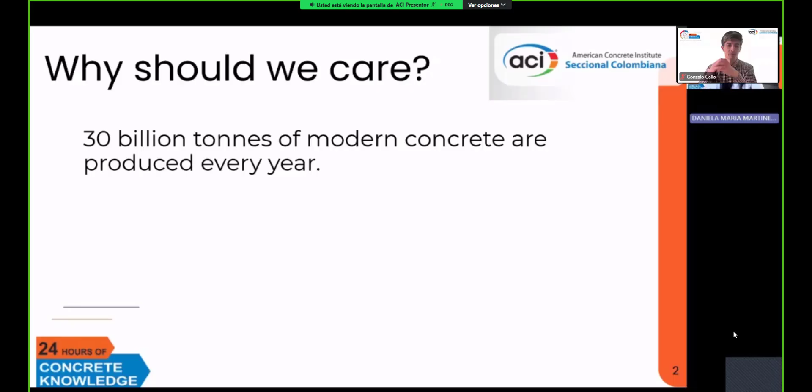In fact, cement, which is the main ingredient in modern concrete, along its supply chain is responsible for roughly 8% of global CO2 emissions and approximately 3% of global energy demand. So this challenge motivates the search for alternative materials, alternative production methods, and lessons from historical construction practices that we can apply, hopefully, in our modern infrastructure.

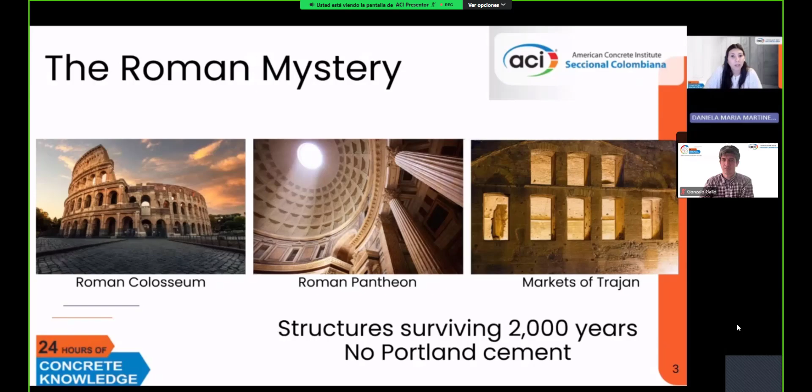So let's talk a little bit more about the Roman concrete infrastructure. Roman concrete has attracted attention because many Roman structures remain standing today. These structures, like I mentioned before, have survived more than 2,000 years and were built without Portland cement. Some of the most famous ones I'm showing here in these pictures are the Roman Colosseum, the Roman Pantheon, markets of Trajan, etc. So we have asked, did the Romans discover a more sustainable way to build, and are there lessons that we can apply today?

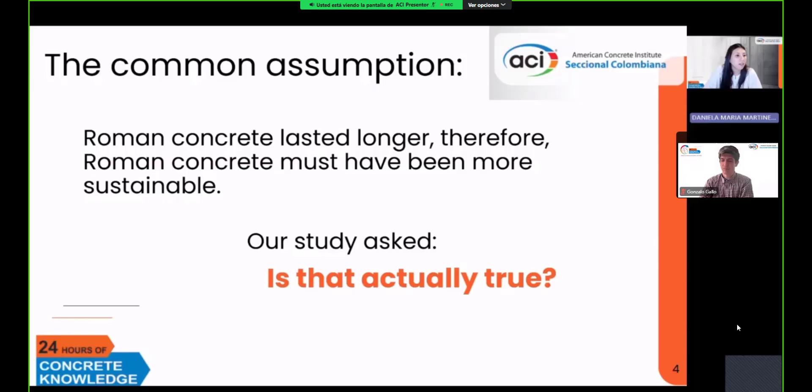So the common assumption usually is that if Roman concrete has lasted longer, therefore Roman concrete must have been more sustainable. So our study specifically asked two questions. Is this actually true? And could Roman technology help us decarbonize construction? But first, we need to learn or revisit what was Roman concrete.

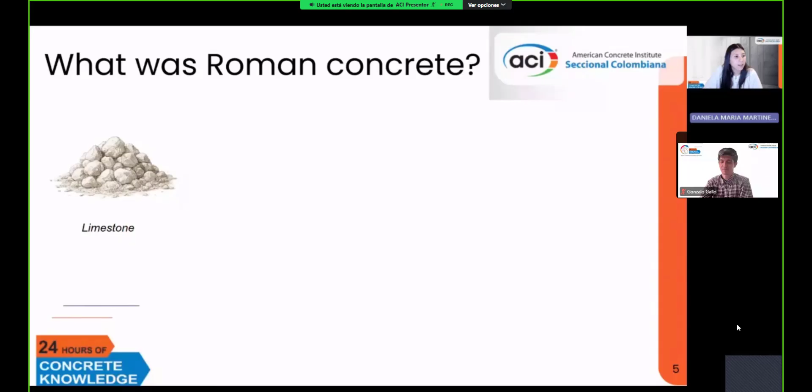Roman concrete consisted primarily of limestone, which is one of the main raw materials that we use today in our modern Portland cement. And this limestone was also heated to a certain level to obtain quicklime or hydrated lime, like we normally do with our modern cement. But this product was also mixed with volcanic ash, which is a pozzolan, and mixed with water to form a mortar. And this water was often seawater.

And this Roman mortar was then further mixed with big chunks of fragments of rocks or rubble from debris from other demolition sites or construction. And this massive concrete was what was used in Roman infrastructure.

So like I mentioned before, limestone first was heat treated to obtain calcium oxide or quicklime or hydrated lime, depending on the mechanism. But limestone had to be first calcined in ancient Roman kilns that were typically fired using biomass fuels. These biomass fuels were usually just wood that they had in the surrounding areas. And in order to obtain quicklime, the kilns were fueled to lower temperatures, usually 900 degrees Celsius, more or less.

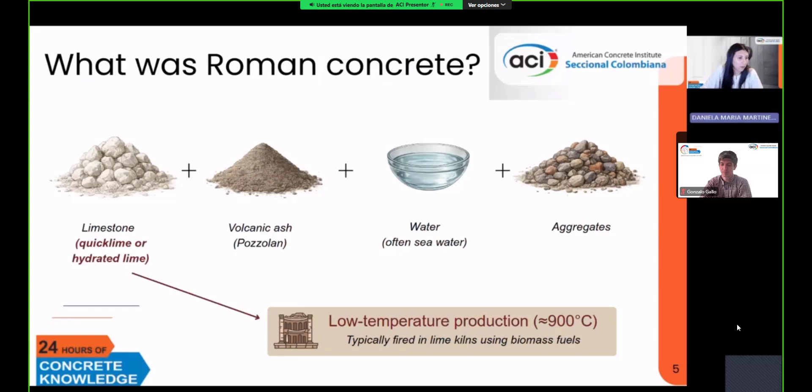So the key chemistry in Roman concrete was activated by the pozzolanic reaction. Now, this pozzolanic reaction means that the volcanic ash would react with lime to form additional cementitious compounds such as CSH over time. So this is the first difference with our modern concretes, where CSH is also the binding mechanism, but it forms rather quickly and not over time like with Roman concrete.

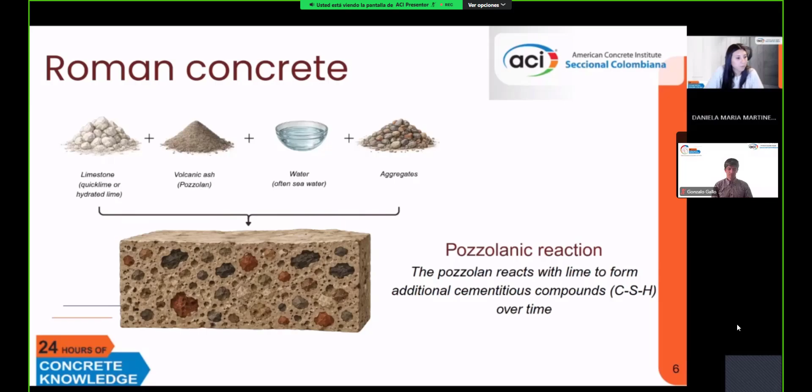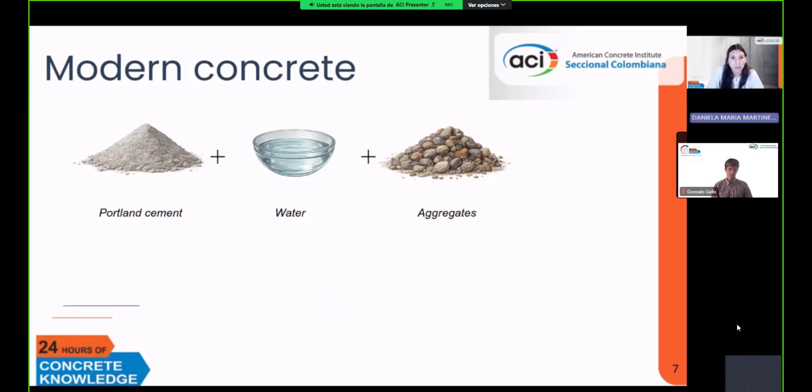In contrast, modern concrete consists mainly of Portland cement and water that constitutes the mortar, and then we mix it with aggregates. In contrast with Roman mortars, the Portland cement needs to be first obtained with a mix of clinker and gypsum, and clinker is produced with much higher temperatures in our rotary kilns.

These higher temperatures roughly reach 1,450 degrees Celsius. And unlike Romans, we have heavily relied on fossil fuels to be able to power these kilns to the temperatures that we need to reach in order to produce clinker.

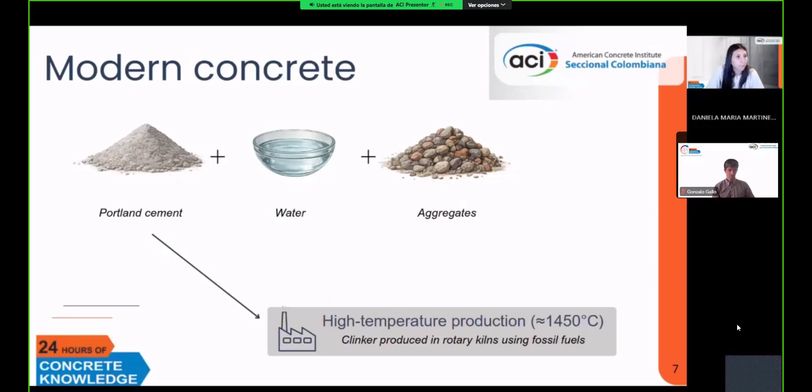So like I mentioned before, modern concrete, the way it works is that cement hydration, when we mix Portland cement with water, cement hydrates and starts precipitation of binding products that are also the type of calcium silicate hydrates, or CSH, and these are considered the main binding phase. But this formation of these binding phases happens rather quickly and not over time or slowly.

Now, since Roman concrete was not made uniformly, we needed to establish certain parameters in order to determine what mixes we were going to use to compare to those mixes that we typically use in modern concrete. So we basically started with our reaction of our raw materials that form the Roman mortar, and then we add aggregates and we obtain Roman concrete.

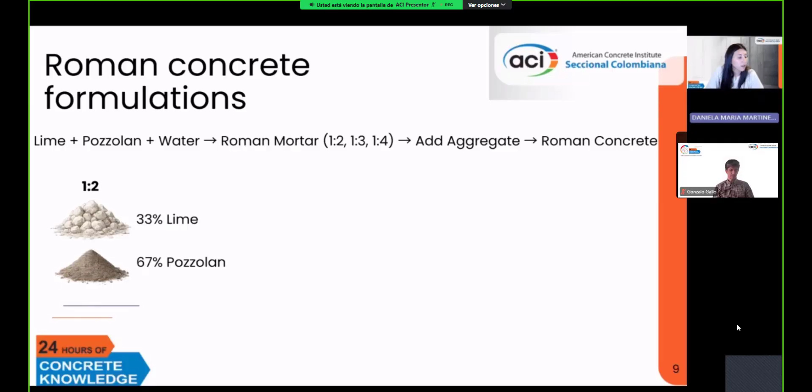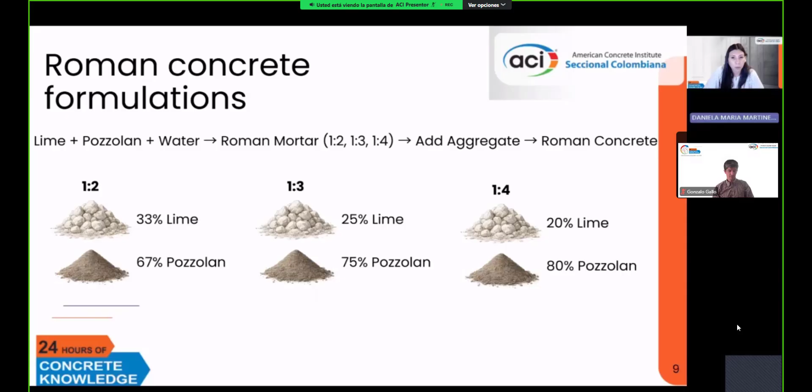The Roman mortar formulations we draw from different reports and studies in literature, and we determined that we were going to model 3 types of Roman mortars, usually found in literature from Roman concrete reconstruction. So the ratios were 1:2, 1:3, and 1:4, and these vary depending on the ratios of lime to pozzolan. These formulations form the basis of our environmental comparison.

So we study all the way from the ancient method to make these materials to the average modern technology that we use nowadays, to a production depending only on biomass as fuel in the kilns, and all the way to fully electric calcination for limestone using decarbonized electricity.

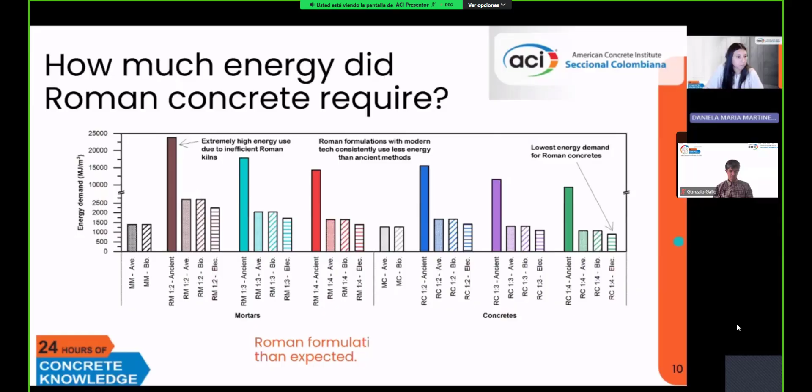Now, while Roman concrete did not consistently reduce greenhouse gas emissions, it did show significant reductions in other air pollutants, which are precursors to compounds that can be harmful to human health. So when we look at estimates on nitrogen oxide and sulfur oxide emissions, or NOx and SOx, we see a big reduction compared to modern concrete production, all the way from 11% to 98%, depending on the production scenario that we were analyzing. So good benefits were observed across fossil fuel, biomass, and electrified production pathways.

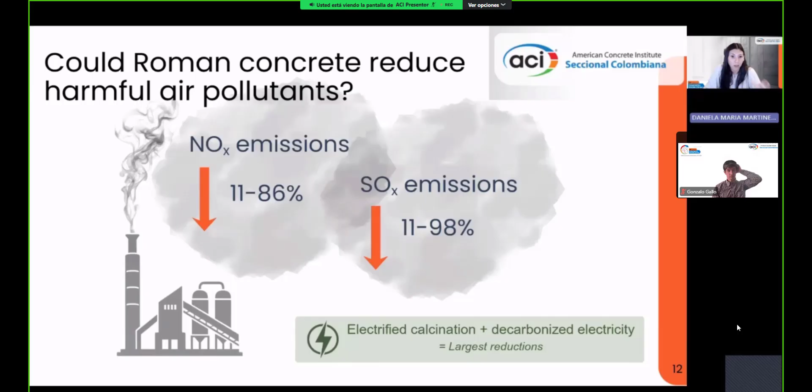Of course, with the largest reduction when we model electrified calcination of limestone using decarbonized electricity. So since NOx and SOx contribute to air pollution and adverse health impacts, then these Roman-inspired formulations may offer benefits beyond this carbon reduction or embodied carbon.

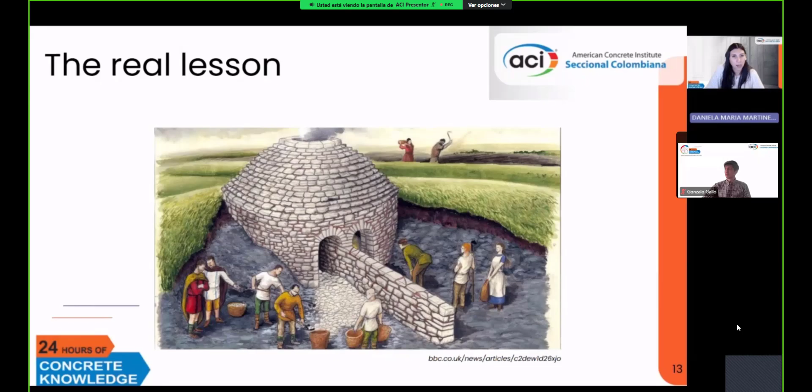Now, like I mentioned, while Roman concrete offers some reductions in CO2 and significant reduction in other harmful air pollutants, the biggest insight that we can draw from our analysis is not the Roman mixture itself, but the way they used to produce it. And so in this case, the real reason why it was more sustainable was because the Romans relied almost entirely on biomass as fuel for their ancient kilns.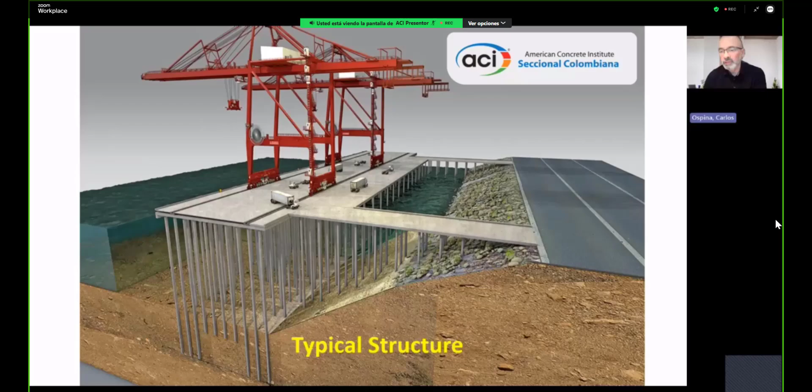This slide shows the typical structure we're going to be talking about today. It is a pile-supported dock or wharf, located near shore. There are a few peculiarities about this structure. Notice the piles are very long and very slender, there are lots of them, and the structure also supports very heavy loading, in this case some ship-to-shore container cranes. So if you locate this facility in a region of high seismicity, now you understand the challenges associated with the design assignment.

Traditional references that we use for the seismic design of this type of structure are the ASCE COPRI 61-2014 standard, Seismic Design of Piers and Wharfs, and the PIANC Working Group 34 2001 guidelines, together with a book published by PIANC in 2001, where the content of the guidelines was substantially expanded.

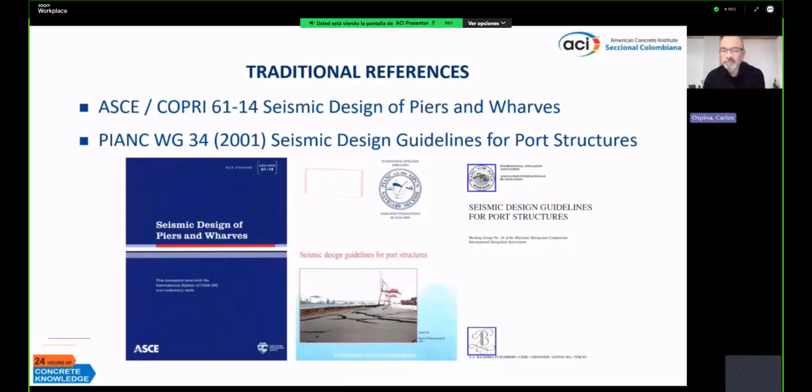The good news is there are upcoming revisions to these two documents. Later this year we're going to see the ASCE 61-26 version; we're in the process of balloting that. I'm responsible, together with John Paul Smith, for Chapter 7, detailing and design of pile-to-deck connections. And PIANC Working Group 225, a new group created 5 years ago, will be publishing updated guidelines with emphasis on port structures in general and their seismic design. That document is coming up later this year too, and for it I'm also in charge of the best design practices chapter, Chapter 7 as well, together with Dr. Smith from Seattle University.

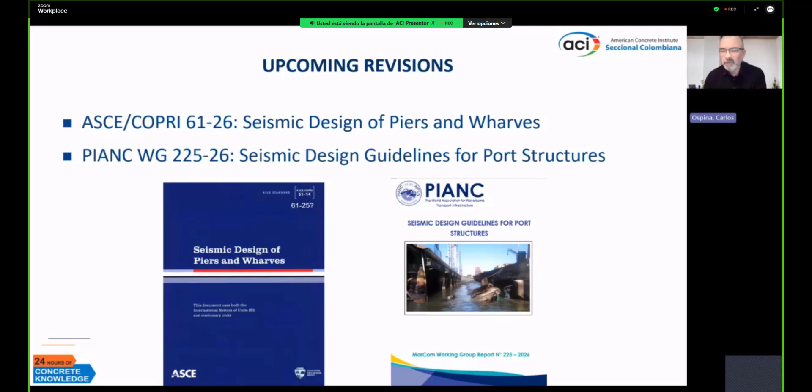The basic concept behind using precast concrete elements in the deck is to accelerate construction. Imagine you are in the middle of the sea, or working over water—you can imagine how complicated it is to transport, produce the concrete, create the mixes, and construct everything with cast-in-place concrete. It is just difficult, which leads to the use of precast elements to accelerate this type of construction. The goal is to emulate the behavior of a cast-in-place concrete structure.

The challenge is how to ensure continuity of all these elements. The design of connections is particularly relevant. We need to make sure structural integrity is complied with, and we need to preserve redundancy if it exists. This is work that cannot be done by just anybody—the contractor needs expertise in precasting, handling precast elements, their transportation, erection, and connectivity on site. And from the designer's viewpoint, the analysis and design of this in stages is very important.

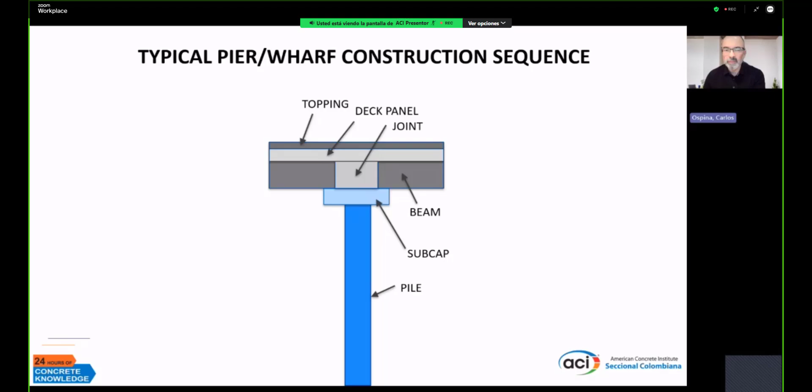A typical pier wharf construction sequence proceeds like this: after the pile is installed and a subcap is provided, precast elements are positioned and then connected together. Then they provide support to precast deck elements, followed by concrete topping that makes the whole thing work as a unit. The stage deck analysis is very important.

There is a message I would like to convey here: the precast beam is like an elephant—it never forgets. The deck constructed this way has to account for the fact that construction doesn't take place in one shot; it happens in multiple steps, and for every step each member will be subject to specific boundary conditions, specific forces, reactions, applied moments, and so on. All of these conditions need to be added up in a form of bookkeeping, just to make sure we're not leaving anything out. So everything starts with the precast beam supported in a simply supported condition, and after they get connected, as you add fresh concrete on top and place more on them, the shears and moments associated with these beams will change, and also the cross-sectional properties. This makes stage construction a very important consideration when designing for this.

Now, this was for gravity loads, so how do you handle seismic? Well, for that you need to keep track of all those forces as well, and when you combine those with the forces associated with seismic, then you have the full picture of what you're dealing with. The design of the joints is particularly key, because it very much ensures that the structure is going to behave according to plan.

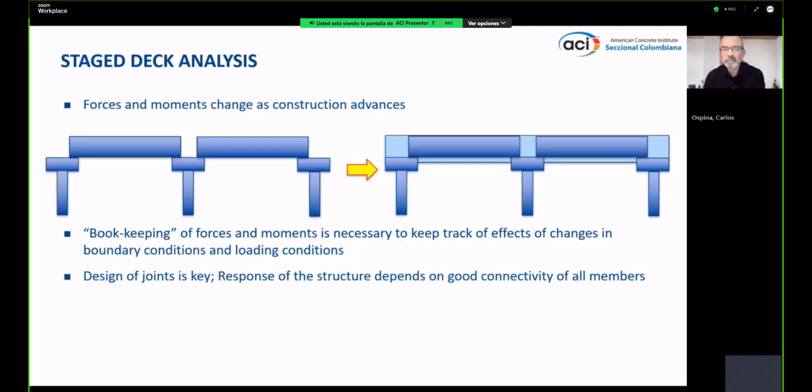Seismic design philosophy just follows this very well-known analogy of the chain, where if you want some ductility out of it and you provide a link that is expected to be ductile, ductility is achieved only if the links adjacent to the ductile link are stronger, right? And this principle has been presented by many of our founding fathers of structural engineering in the past, and I'm not going to elaborate on that, but just to say that this is the principle

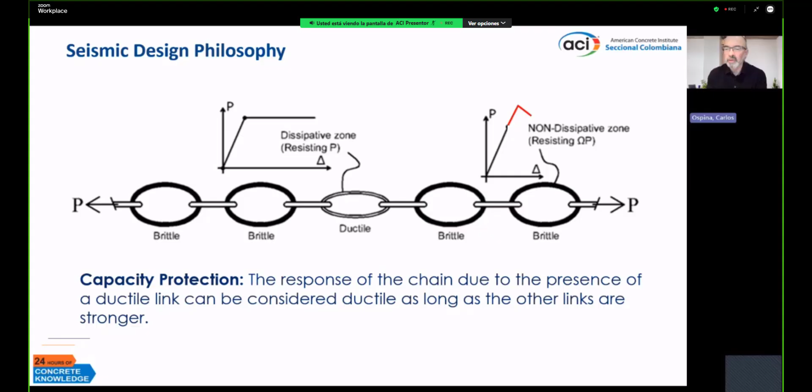that we're going to be following here. For the specific case of this type of construction, wharfs and piers, the philosophy is similar to that of bridges, which is opposite to that of buildings. So in wharfs and piers, we follow what is called the strong beam, weak column, or weak pile approach, which is similar to bridges. So in this case, the damage takes place in the piles, right? The piles develop hinges, top and bottom, as a form to absorb and dissipate energy, and the deck stays almost elastic. And it's important that it stays elastic because of the heavy, expensive, fancy equipment that operates on top.

Pile deck connections are either full or partial moment connections. And the good thing about this is the designer fully controls how much moment and forces get transferred from the piles up to the deck. Remember that as the ground shakes, through the inertial response of the structure, the piles transfer forces and moments to the deck. And so that connection is designed by the professional in charge of that design, and so it controls how much moment and how much force gets transferred to the deck. So it's critical to determine the right amount of bending that the piles transfer to the deck.

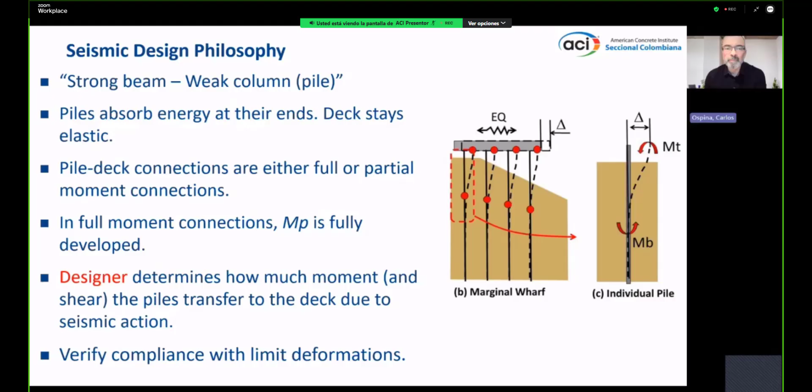And as long as we comply with certain limits of deformation for different components, we're fine. We're following what the standard asks us to do. Seismic resistant elements are typically the piles, and in the case of a marginal wharf like this, the more rigid piles are the ones near the shore, which have the shorter length, so hinges are expected to form there. And just as we are doing that, we're also trying to prevent brittle shear failures in these piles.

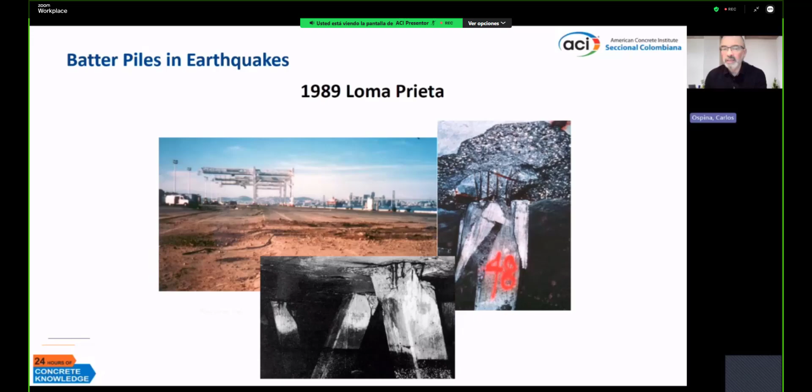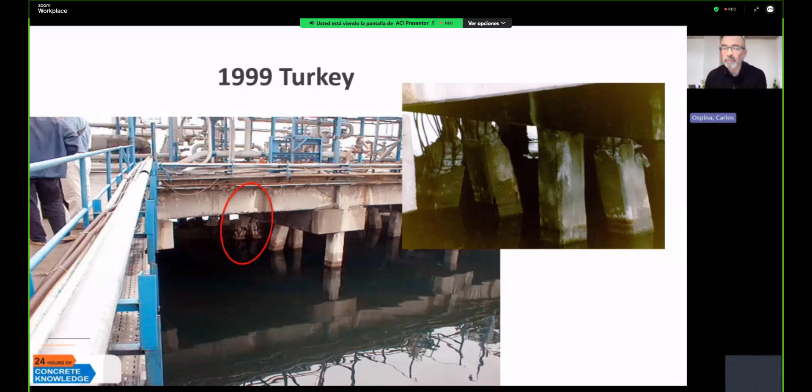As an aside, we're going to look briefly at the response of batter piles in the past. For seismic, they are not recommended because they tend to attract quite a bit of lateral load. And therefore, unless you make adjustments to the connection with the deck, you're going to have shear failures at the top of those piles. There's evidence of this in Loma Prieta and Turkey and many other events. Batter piles are important. We're not saying that batter piles should be avoided in regions of high or moderate seismicity. We're saying that if you need them to provide lateral stiffness to the structure, you need to be careful when you connect them to the deck to try to avoid the damage that I just showed.

Seismic capacity protection is a very important concept to follow. Essentially it calls for the deck to stay elastic with a little bit of cracking, regardless of pile damage or deformation. And it is achieved simply because I know how much moment I'm transferring from the piles to the deck, so I'm designing the pile to deck connections and the deck for a moment that is slightly larger than the moment that the piles transfer. In this case, it's 25% more.

If a pile stays elastic, then the 1.25, the 25% increase, is applied to the maximum elastic moment, not to the Mp value. The Mp is the maximum probable flexural strength of the pile. Shear, because of its brittle nature, is a capacity protected action in the piles.

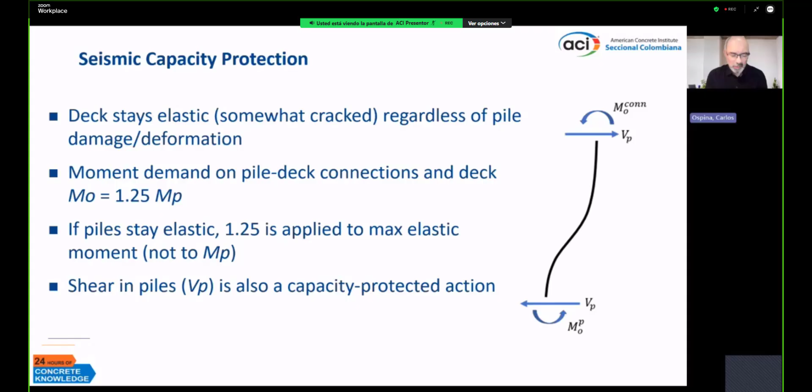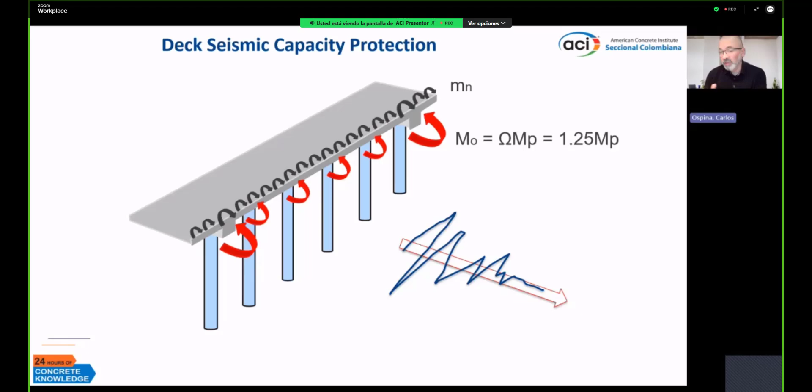In a graph, this is shown in the form of seismic load applied in the longitudinal direction. Imagine all these moments transferred by the piles. So whatever red moments are applied on the structure, the resistance is offered by the deck. What's important is to make sure that we resist everything you see at the top of the piles, properly factored by this 25% factor.

And the slide where it says if you're transferring 25% more, then what this means is that a thin deck is going to crack a lot as these piles transfer this amount of moment, and so to be able to provide capacity protection, you need a thick enough deck so that you can resist the factored moment that is transferred from the piles to the deck.

And so with time you develop a skill to understand, just by looking at the deck, you get a good feeling if the deck is capacity protected or not.

To design the connections of all these different deck precast elements, the mandatory source of information is research that the bridge folks have done. So Transportation Research Board or Federal Highway Administration have done a lot of work examining how to provide continuity and how to connect precast elements in this type of construction. So we're using that. And the pioneers in the seismic design of marine infrastructure got this information and adapted it

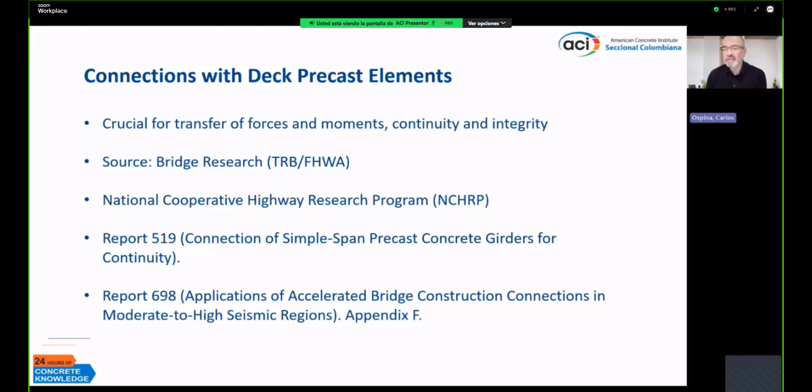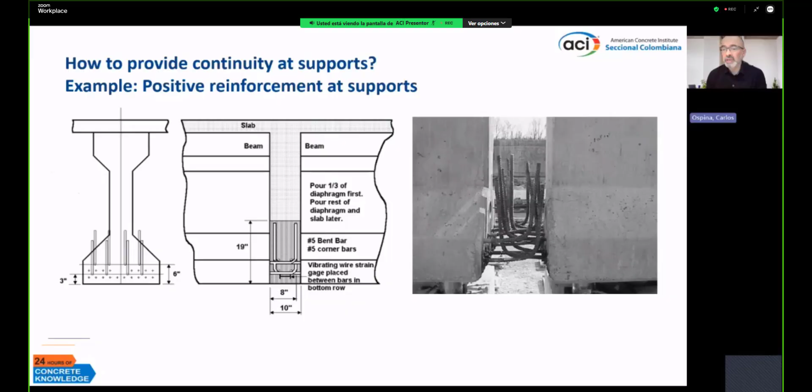to our needs. So let's say 50 years ago, they tested the PCA beams, bridge girders with hooked ends, and so the provisions were developed to provide connectivity between them, and the tests were conducted on the connection to ensure that the whole connection would stay solid during cyclic loading.

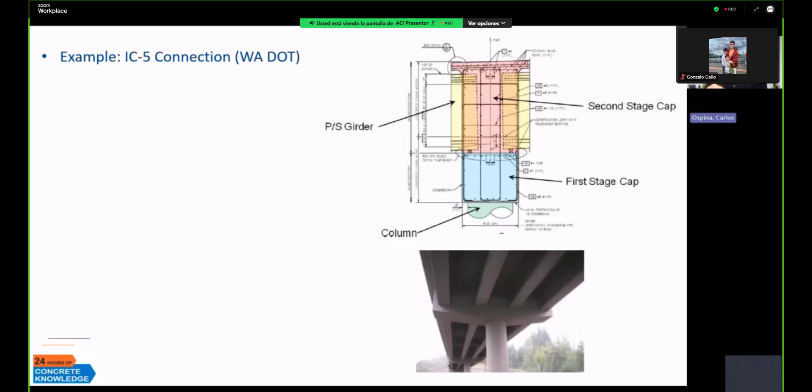This is an example of something done by Washington Department of Transportation, in which you can see the two girders, the girder ends in yellow color with the extended bars, connected right on top of a subcap or a pile cap, with all the shear reinforcement and joint reinforcement that goes in the joint, just to make sure that the two girders are continuous.

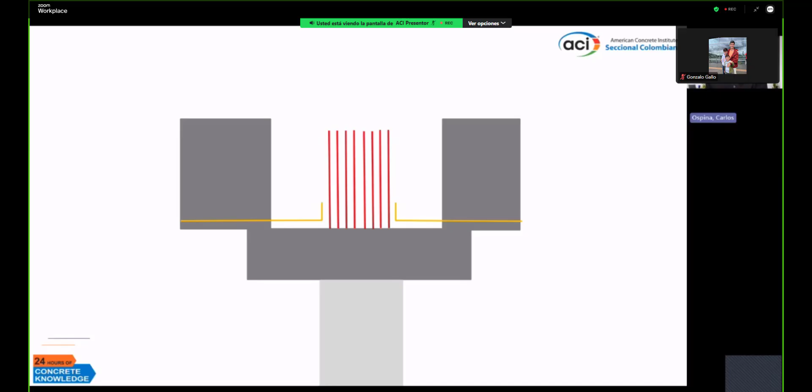So this type of construction is nothing other than, in this case, you have the pile, the subcap, and the precast elements landing on top. And you have cast-in-place concrete, with precast panels, concrete topping, and proper evaluation of where you calculate the negative moment demand of the precast elements.

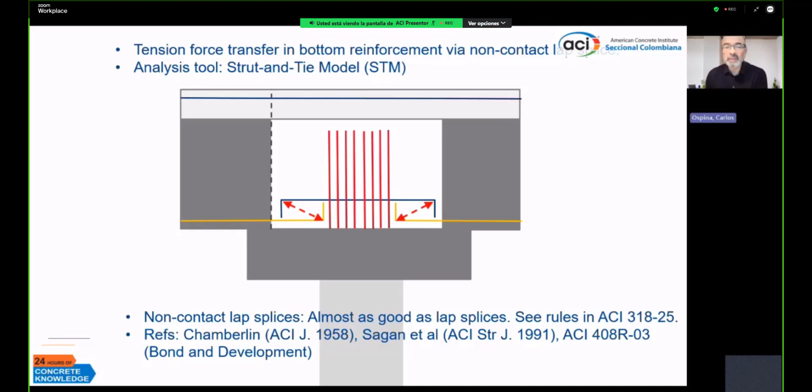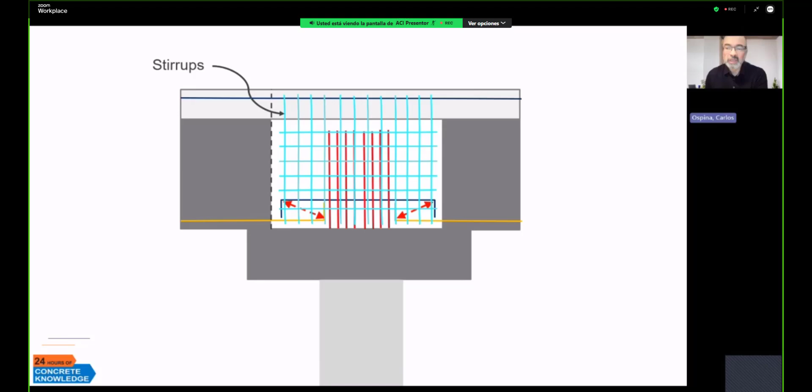And then what we began discussing and introducing to the standard is just how to define the amount of reinforcement to provide continuity between the ends of the precast beams. And so as long as you provide sufficient reinforcement in the form of either contact or non-contact lap splices, you are good to go. So you provide enough bars at the bottom and hoops and whatnot, then you have a very solid joint that can provide good continuity between the girder ends.

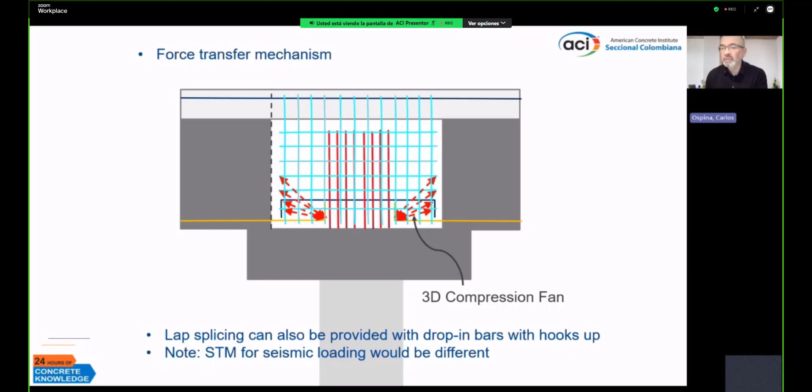So all you need to do, just to understand what the joint reinforcement is doing, is to develop a series of strut and tie models, and because of equilibrium, you can find that the forces on the horizontal ties, together with diagonal compressions developed between the hooked end portions of the bottom reinforcement and the joint reinforcement, provide the proper path for force transfer from one girder to the other. In plan, that strut and tie model looks like this.

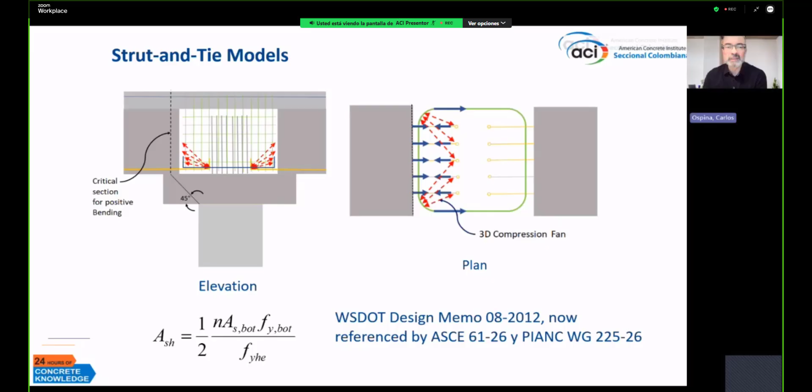And just to calculate the amount of reinforcement, we're recommending this expression that was originally developed by Washington Department of Transportation. It simply defines the amount of joint reinforcement necessary to develop tension from one side to the other.

When you have more complex conditions, introducing, let's say, lateral loads, you can also use the strut and tie model to get a feeling of forces, the flow of forces, and the amount of tension and compression in the joint. So this leads to adjustments in the amount of joint reinforcement depending on the conditions that the joint is going to be subjected to.

Samples of things that you could do to provide continuity are the headed reinforcement shown on the left, or double hooked bars, and just simply drop them. There's no guidance, unfortunately, from 318 on how to do this and how to define the LST, the development length, or the splice length between the two.

But if you assume that this LST is greater than the development length of a hooked bar, that 1.3 factor comes into play. It could be reduced if you provide sufficient joint reinforcement using the provision that we saw earlier, to try to minimize the size of that subcap that supports the precast beams.

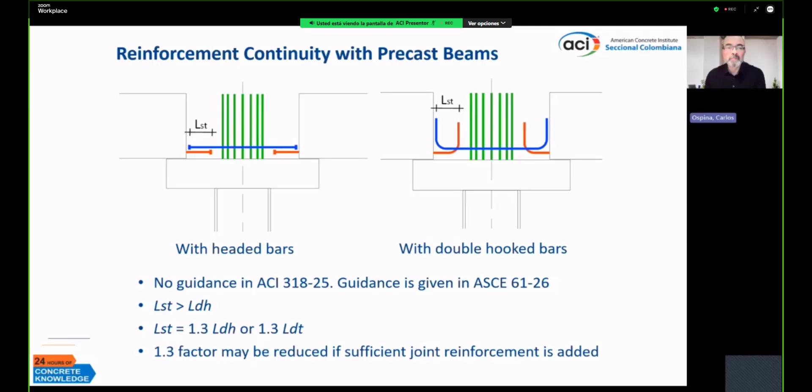Let's look at different types of connections. So these are connections that involve steel pipe piles, as presented in the upcoming version of the ASCE 61 standard. The most popular ones are, from left to right, the second and the third, which make use of a reinforced concrete plug and the use of dowels. And the dowel, in essence, transforms the steel pipe pile into a reinforced concrete member to transfer the forces and moments from the pile up to the deck.

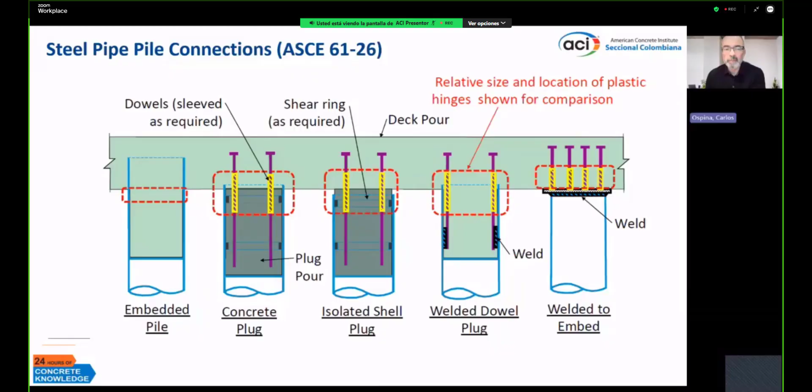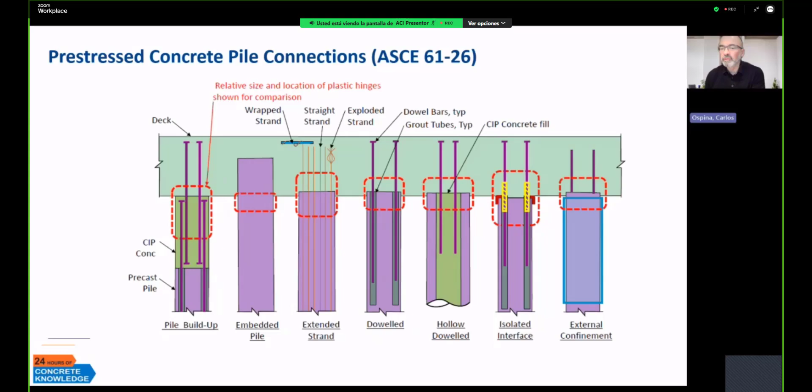The concrete pile plug is very, very common when you see connections involving steel pipe piles, and that plug is cast in place. That's the most common form, and the plug is nothing other than a subterfuge to develop the couple, the moment, at the top of the pile.

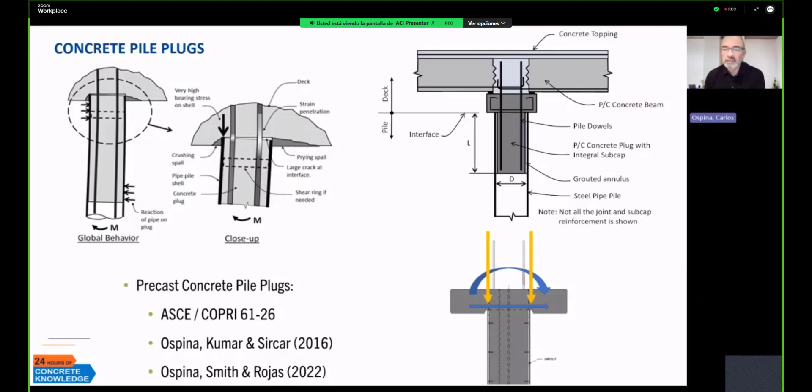And so there have been recent efforts to replace the cast-in-place concrete plug with precast plug units to accelerate construction. You can mimic that with a plug that resembles the cast-in-place plug, and you fill out the annulus between the precast plug and the surrounding casing of the pile. Then you're good to go. These plugs support the precast elements on top. And the references that you see on the screen show the rationale behind the development of the plug.

In an ordinary plug connection, we assume that connection at the top takes between 30 to 50% the MPE at the bottom of the pile, or at the steel portion of the pile. If a reinforced concrete plug is too strong, the moment is much greater than MPE, and that could lead to problems in the in-ground region of the pile. It could even increase rotations, and it could generate local buckling problems.

How to predict that MPE? You have to understand that you need to properly account for the presence of concrete. You just cannot disregard that there is concrete there, right? And how composite the section acts depends on how the steel casing and the infill, the concrete, behave, and how thick or thin that steel casing is. And so the evaluation of MPE is very important. Remember, you're controlling the capacity protection of the deck based on that MPE assumption.

Flexural capacity of a plug is affected by axial load level, and we know that because you're familiar with reinforced concrete column design. Now, not all the precast pile plugs are supported the same way, so you need to be careful when evaluating the effect of axial load on bending. For local buckling, you need to be careful with the size of the steel pipe pile relative to the thickness of it. As the D/T ratio increases, the chances of local buckling increase. So you need to be very careful with defining the so-called critical strain.

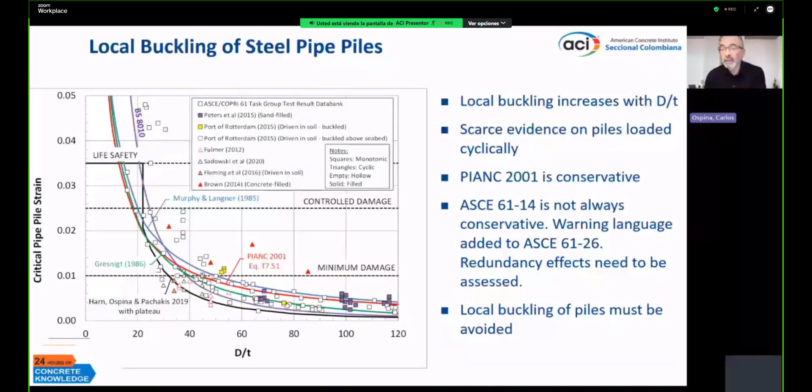You need to be aware that the provisions in ASCE 61 are not always conservative, and there may be circumstances where you just can't achieve the target strains that the standard expects you to follow, especially for the life safety condition. You need to have a pile that is super compact to achieve those limiting strains. So you need to be careful when local buckling is a possibility.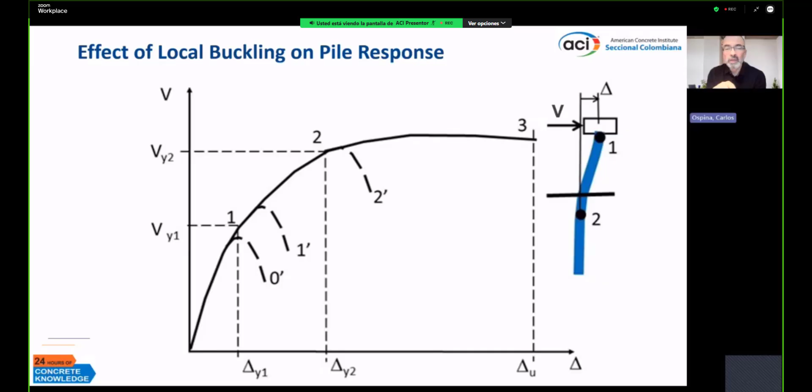This shows the effect of local buckling on the response of a pile. So if you want to do a pushover and expect full development of hinges without losing capacity or generating instabilities, you need to make sure you prevent the local buckling. Otherwise, your response could be shortened substantially.

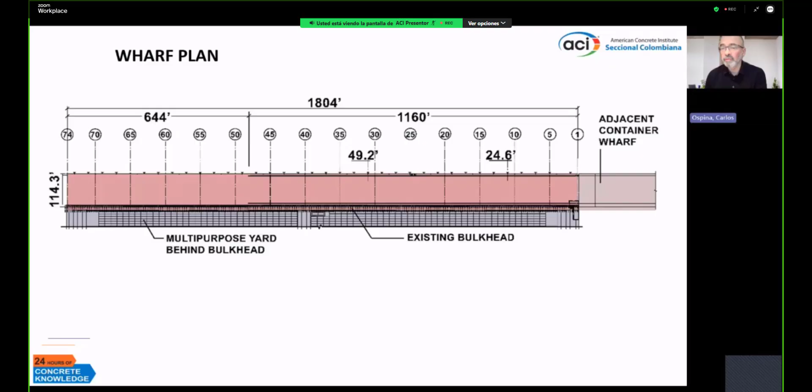We have 5 minutes to talk about a representative project where you're going to see the use of precast deck elements and how we accounted for that in design and also in construction. The project is located in Veracruz, Mexico, in the area shown in the red oval. The marginal wharf is nearly 1,800 feet long and 114 feet wide, completely encased by existing structures. The soil stratigraphy shows multiple strata of clays and sands, and the soils display setup. That means that the piles that get driven into it gain capacity with time.

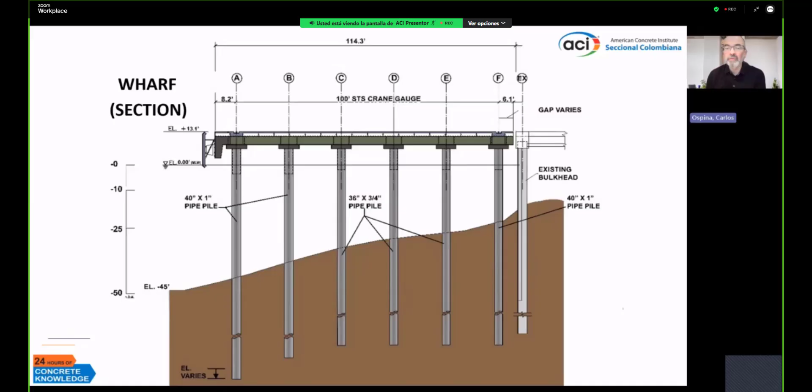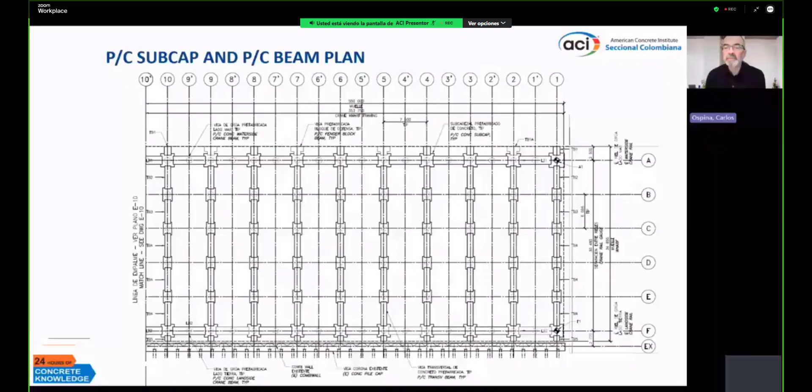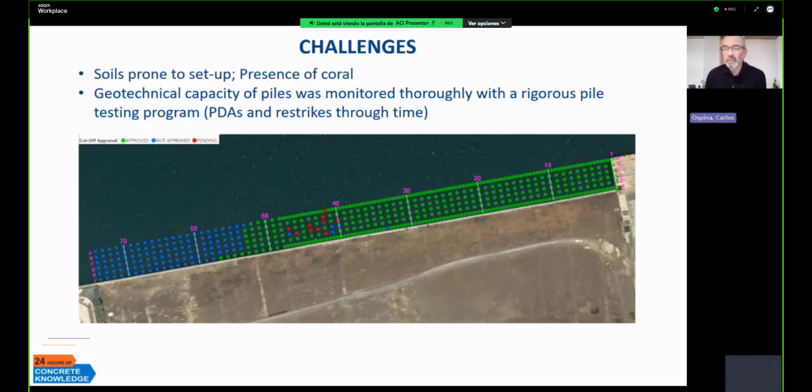The slide shows the way we monitor the geotechnical capacity of the piles and the status of the piles. There are piles that were installed, piles that haven't been cut off yet, and piles that have been. These piles were subject to a very thorough pile testing program because of the challenges introduced by the soil. In some cases, the piles doubled capacity with time. This picture shows the steel pipe piles.

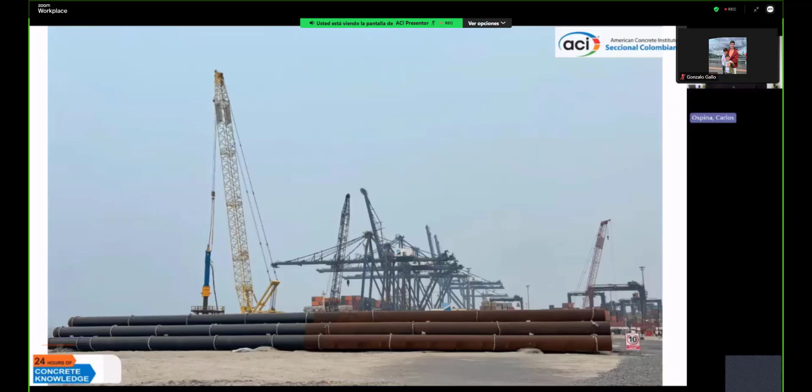And you can see the coated end on the left, all piles installed, very well positioned because of the nature of construction. So you have two top-down systems. The one on the right is responsible for installing the piles. The machine, the crane, installs piles and then crawls over them and moves in a linear fashion, whereas the second front installs the precast elements that make up the deck.

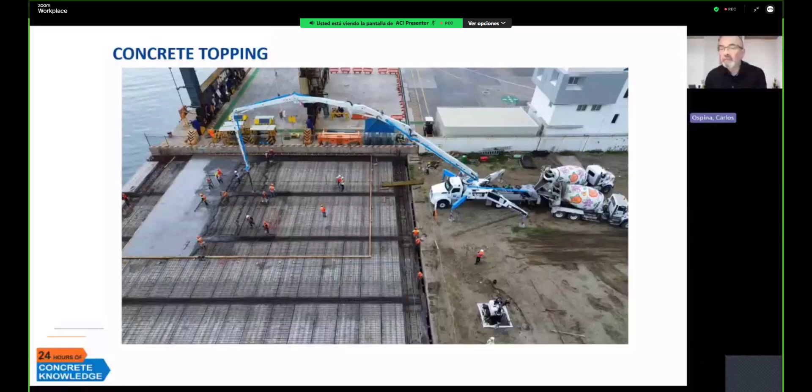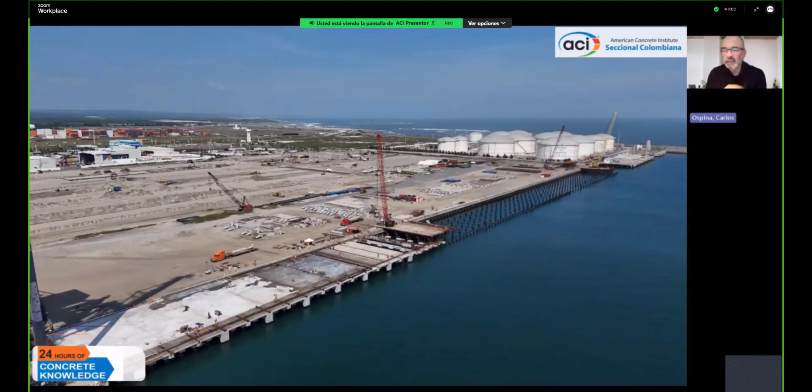It shows the entire construction in one shot, showing the piles at the front and the decking proceeding behind. It's a very, very fast procedure. In this particular project, nearly 540 piles were installed in 6 months. Very capable contractor, Simesa Soletanche Bachy, and the entire work, 1,800 feet, built in 12 months. This is because of this technique.

Just to conclude, seismic design of piers and wharfs with precast deck elements has reached adulthood, in the sense that the standards now provide very specific recommendations on how to deal with the precast nature and the staged construction nature of these structures.

The most appealing application by far is the accelerated construction of piers and wharfs supported on piles, where massive use of precast elements is adopted for lots of reasons: because you want to finish earlier, because you want to get ready for bringing new equipment, and because you want to build things fast. The design and detailing of these elements is very important, and the way they are connected is critical for an adequate seismic response of the pier and wharf structure.